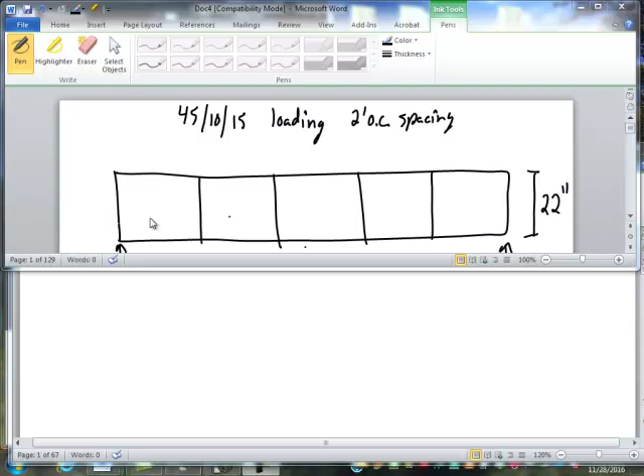Okay, so what we're going to look at today, and I'm going to throw a couple of other things in along with just the truss analysis. We're going to look at a floor truss, a parallel chord flat truss. I haven't put in a web pattern yet, and I haven't given you any of the forces yet, because we're going to look at how we're going to figure that out. So I'm going to throw the web pattern in just like this.

Almost always this web on the heel panel will come down to the lower corner at the bearing or the reaction. For this one, since there's an odd number of panels, the middle one just can go a random direction. We're going to assume that each of these uprights is evenly spaced.

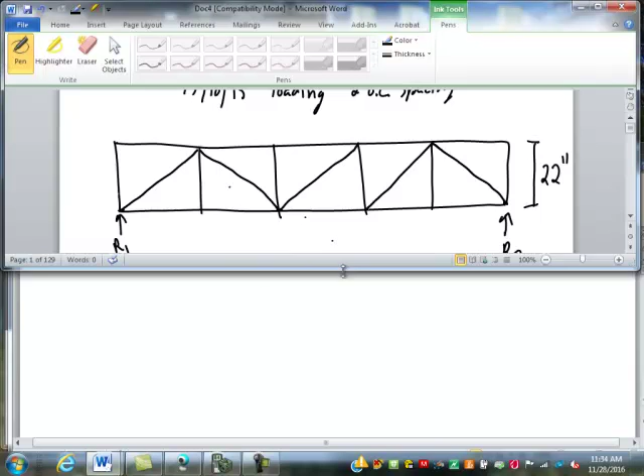So this is, let's go a little bit bigger here for just a minute. This is a 20-foot truss, so each of those panels is going to be 4 feet, or 48 inches.

So one of the first things we have to do is figure out what the load is, what the force is at each of the joints, because we're going to be looking at the joints. Then we have to figure out what each of our angles are. This angle here is going to be the same angle pretty much everywhere in the truss. So let's go ahead and do that first. Good way to warm up, just reviewing some trig.

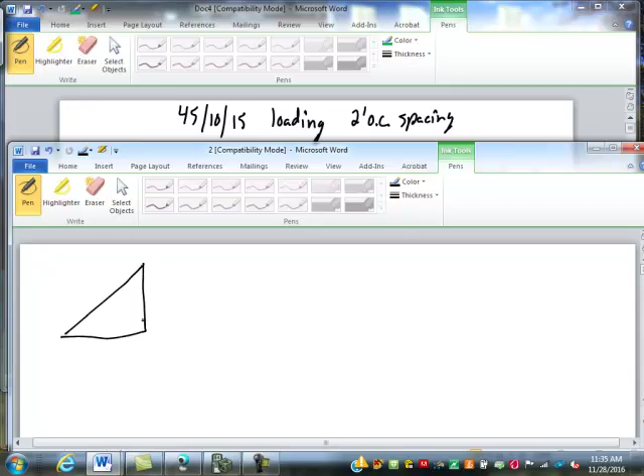So what we're looking at is this angle here. This is a 4-foot, or 48-inch, panel. The truss is 22 inches high, so this is 22 inches here. So this angle, let's see if I go to the right spot.

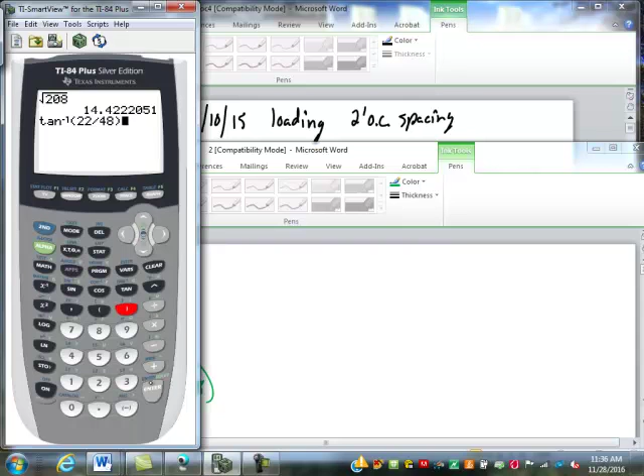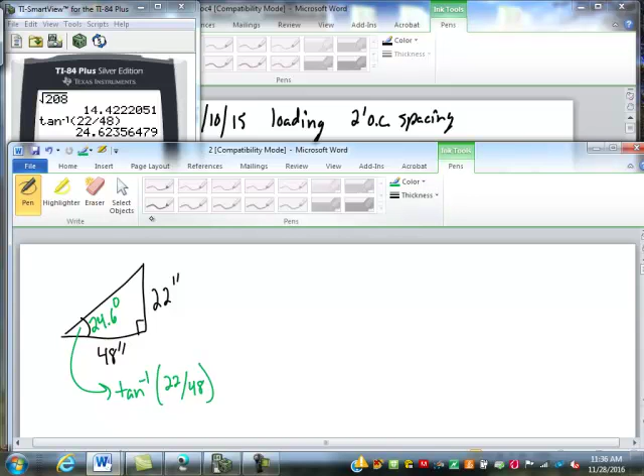That angle here is going to be the inverse tangent of, what two numbers do I put in there? 22 over 48. Perfect, 22 over 48, opposite over adjacent. So we'll do that, inverse tangent, 22 divided by 48. And that gives us a 24.62 degree angle right here. We're just going to go 24.6 degrees. So that's going to be that angle prevailing pretty much everywhere throughout this truss, at every angled web.

Next, I want to figure out what the force is at each joint here, what that added force, that vector is. I have up here 45, 10, 15, loading, 2-foot spacing.

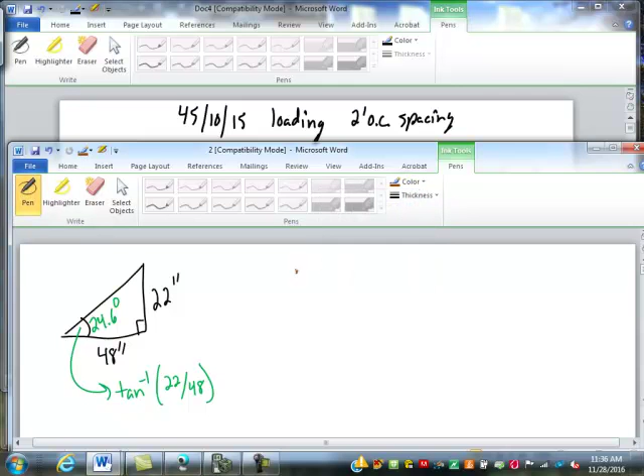What 45, 10, 15 means: the first two numbers, as we mentioned last week, are the top chord loading. The 45 is the top chord live load. The 10 is the top chord dead load, so that 10 is for the floor, the carpeting, whatever else is going to sit on there. Sometimes they'll do a 45-15 if you're going to have tile floors and some heavy furniture and stuff like that. We're just going with a simple 45-10. Now this is per square foot.

Now you'll notice I said 2-foot on-center spacing. So every linear foot of this truss, since it's 2-foot spacing, if I'm looking at it from above, since it's 2-foot spacing, each linear foot of that truss—here's one linear foot of the truss—contains 2 square feet, because it's 2 feet between trusses. So it has 1 foot on each side of that truss that's supported.

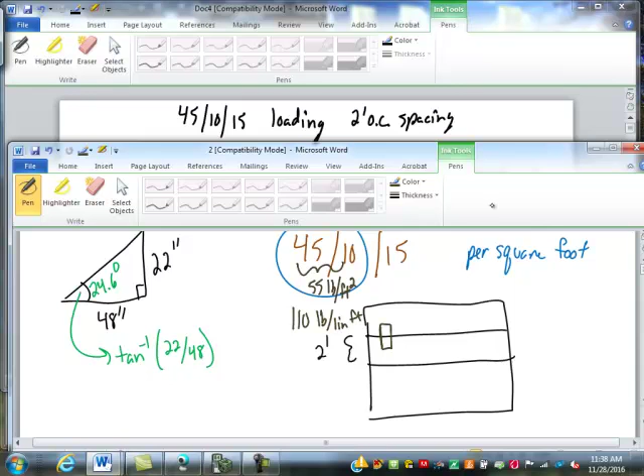So that is 45 plus 10 is 55 pounds per square foot, which is going to turn into, multiply that by 2 because each linear foot of the truss supports 2 square feet, 110 pounds per linear foot. So every linear foot of the top chord of this truss supports 110 pounds.

So now if we go back up here, each of these is 4 feet. We're assuming that they are symmetrical and evenly loaded. So 4 feet times 110 is 440. So each end of this is 220 pounds. Now right here we get 220 pounds from this side and 220 pounds from this side, so that'll be 440 pounds there. 440 pounds here. Here. Here. And then this one's back just 220.

Now I'm going to pause for a second. Any questions on where the 440 and the 220s come from?

So what I did was look at the top chord: a 45-pound live load and 10-pound dead load per square foot, giving 55 pounds per square foot. Looking at a single linear foot of the truss, it's supporting 55 pounds. Because it's a 2-foot spacing, there's 1 square foot on each side supporting 55 pounds, so each linear foot of that truss is supporting 110 pounds.

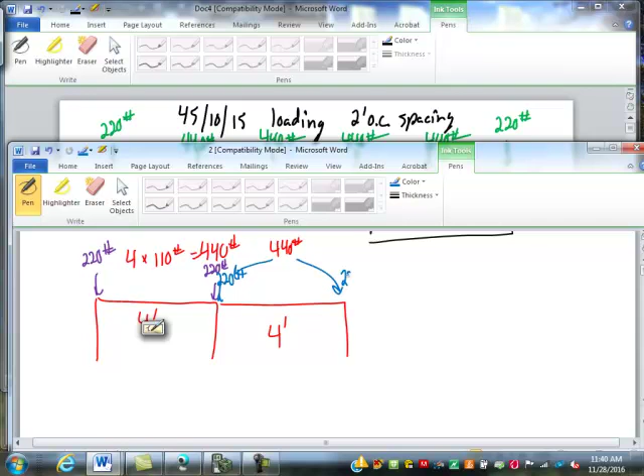However, since this is continuous, this 4-foot panel also supports 440 pounds, half split 220 to each end as well. So right here we have a combination of 220 and 220 - that's where the 440 came from. Each of these gets 220 from each side. This one is only 220 because there's nothing on the other side - it's only supporting one side.

Any questions on that?

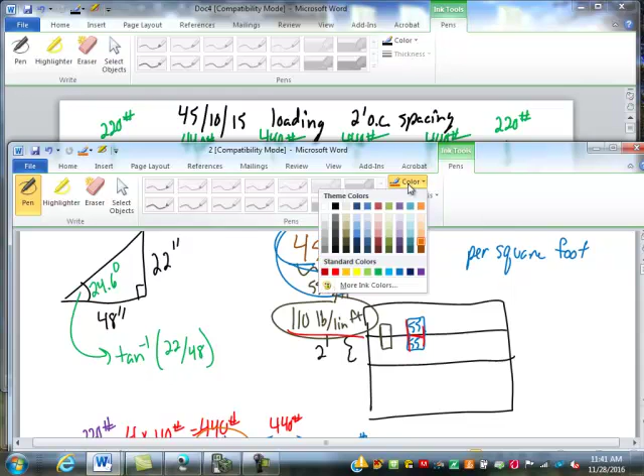Now we have to do a similar thing for the bottom chord. The bottom chord is a 15-pound dead load, for your mechanicals, wiring, plumbing, ductwork, all that stuff, and that's also 15 pounds per square foot. So on the bottom chord, there's 15 pounds per square foot supporting 2 square feet, meaning a total of 30 pounds per linear foot on the bottom chord.

Same type of thing as we did down here. On the bottom chord, 30 pounds times 4 feet is 120 pounds total, half goes to each side - 60 pounds here and 60 pounds here. But again, there's 120 pounds here that's split, so there's 60 pounds coming from that side as well.

60 pounds here. So what that means is back here, each of these joints has 60 pounds coming right here. This one's got 120 because it's 60 from each side - 120, 120, 120 and 60.

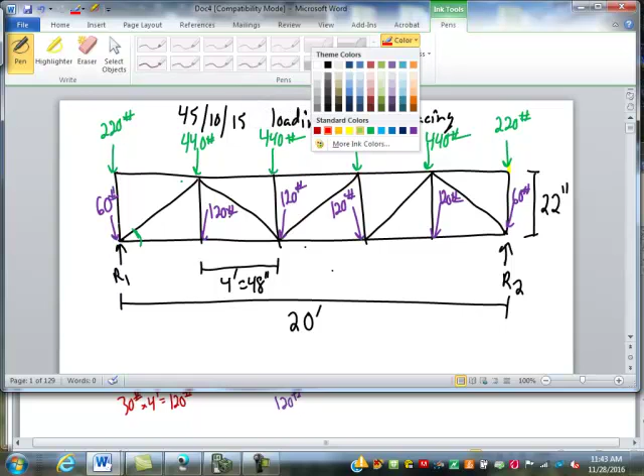So then our next step is to figure out the reactions. If we look at each of these, it's symmetrical, so we're just going to add up our total load and divide it by 2. Have you guys gone through how you calculate a reaction if they're not symmetrically loaded? Using sum of moments? Okay, that's something we'll look at - if we don't get time today, we'll look at it Wednesday. But we have 220, 440, 440, 440.

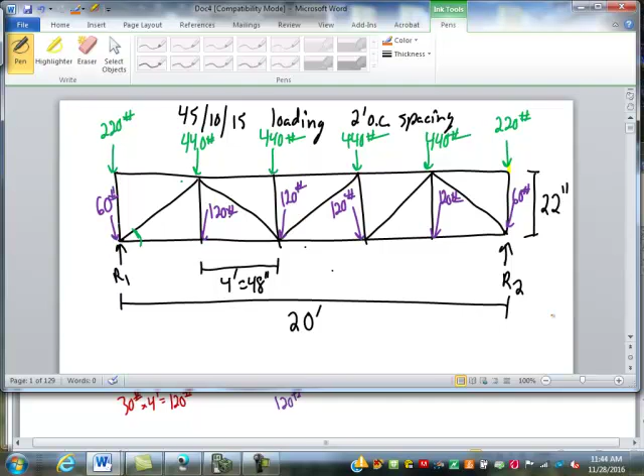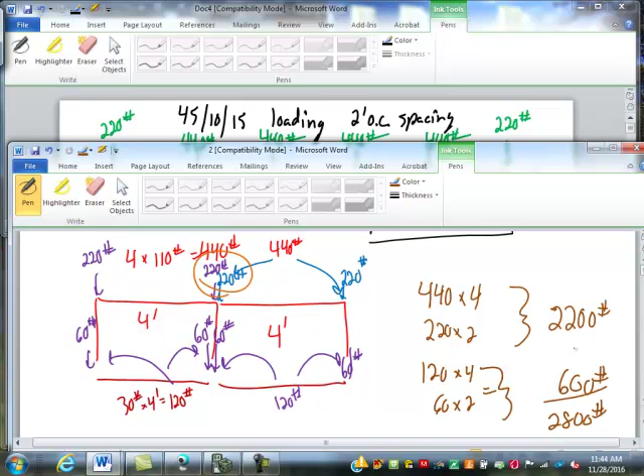Let me do this here quick - shrink this up. So I've got 440 times 4, 220 times 2, giving a total of 2,200 pounds. On the bottom I have 120 times 4 and 60 times 2, giving a total of 600 pounds. So I have a total of 2,800 pounds here of downward load, which means each reaction has to be half of that pointing upward - 1,400 pounds each.

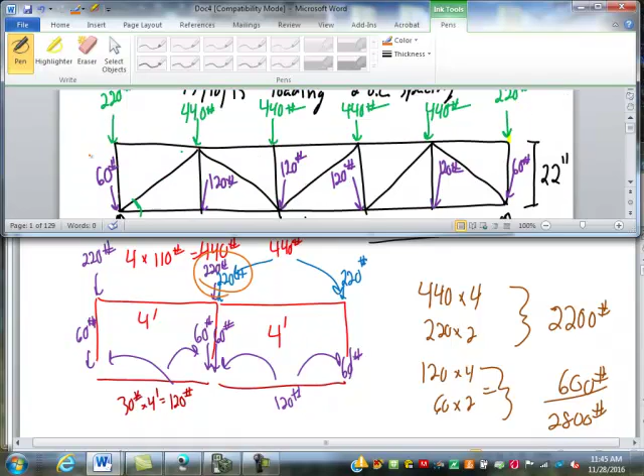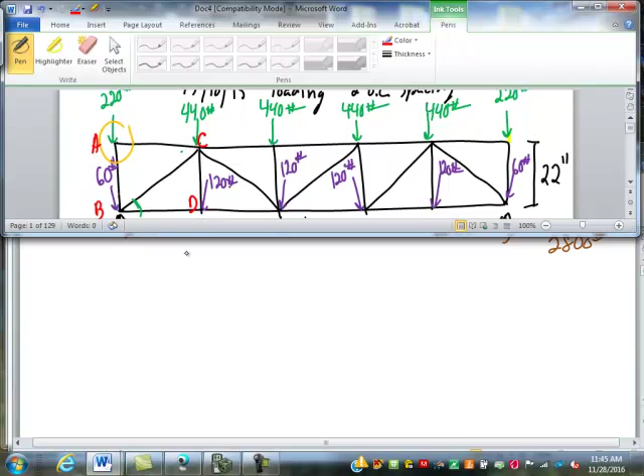Okay, when we go to analyze these, it can be a little bit strange. We're going to start out analyzing this top joint right here. Normally we would analyze first the heel joint at the reaction, but on these, that top joint is simplest because there's only one force and only horizontal and vertical members coming in. So I'm going to call that joint A, and I'll call this one down here B and this one C for now. This one will be D. So we're going to analyze joint A.

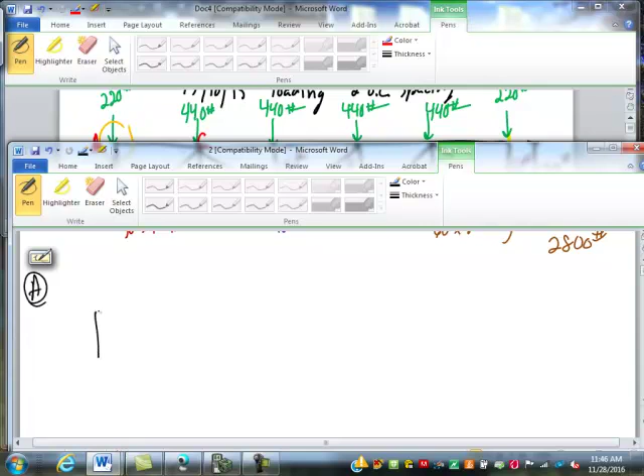At joint A, we've got truss members coming in from C and B, and we have a 220-pound load going down. At this point, that's the only force we have - that 220-pound load. If this were a real floor truss, we would have an additional wall load that we'd put there, but I didn't want to overcomplicate it.

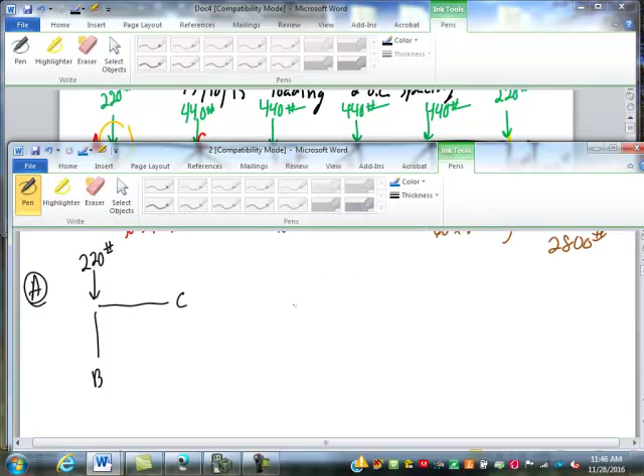So anyway, if we're looking at the sum of our vertical forces, we have the 220 going down, that's negative 220 pounds. C is totally horizontal, so it cannot have any vertical component. B is totally vertical, so it can only have a vertical component - B has to be going completely upright. So solving for B, it has to be 220 pounds. Now from last week, I drew this arrow towards the joint because it has to be going up to counteract the 220 pounds going down. So if that arrow is going towards the joint, is this in tension or compression?

Compression, exactly. So that is in compression. Member B is in compression.

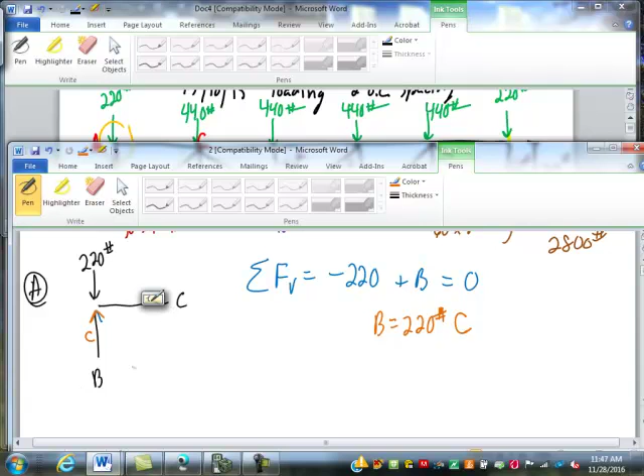Member B here, so that'd actually be force B to A, but I did poor notation there, didn't I? That should be force B to A, is in 220 pounds of compression.

Now C to A here is kind of a funny situation. It cannot be in tension or compression because there are no other horizontal components there to work against it. The only way it would have any sort of load on it is if there were a wind load or something like that coming in from the side. We don't have anything like that right now.

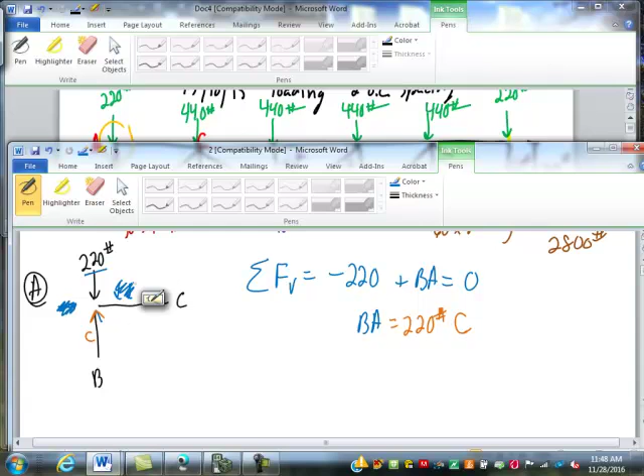So the compression or tension on member C is 0. Now it does have loads. It's got the vertical loads that are split. That's where the 220 came from. But we're not worrying about those right now. Those are bending loads. So if I come back up here, this is 0 pounds. This is 220 pounds of compression.

So if I go to analyze joint B, on joint B, I have the 220 pounds of compression, and so 220 pounds going down, pushing into the joint. I also have the 60-pound load going into the joint. I have this web here coming from C, and I have this heel panel here coming from D. And then, of course, we have the reaction coming up of 1,400 pounds.

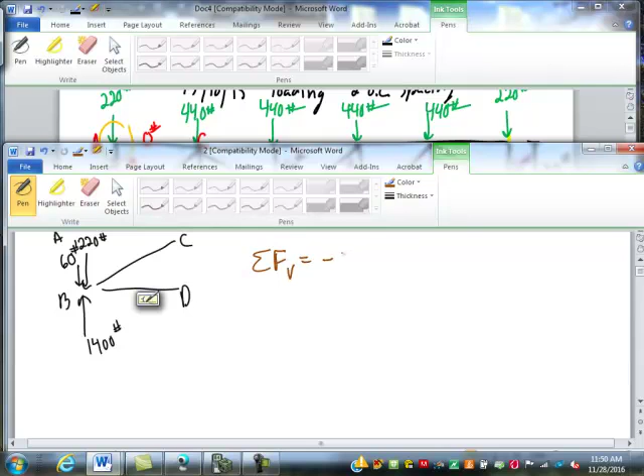So I'm going to look at my vertical forces here. I have a negative 220 because that's pushing down. I have a negative 60 because that's pushing down. I have a positive 1440 because that's pushing up. Right now that would put me at a positive. So I'm going to guess that C here is in compression.

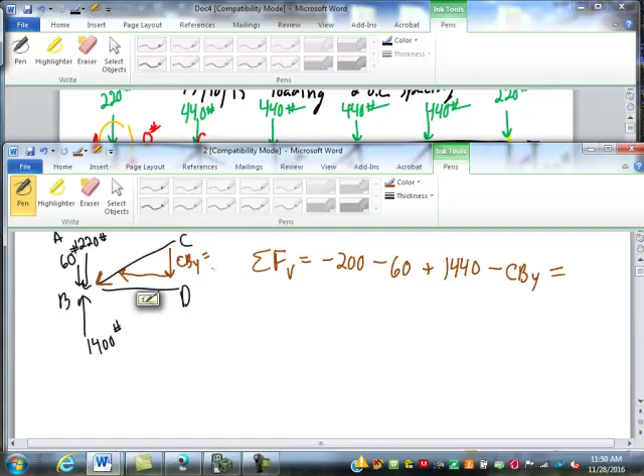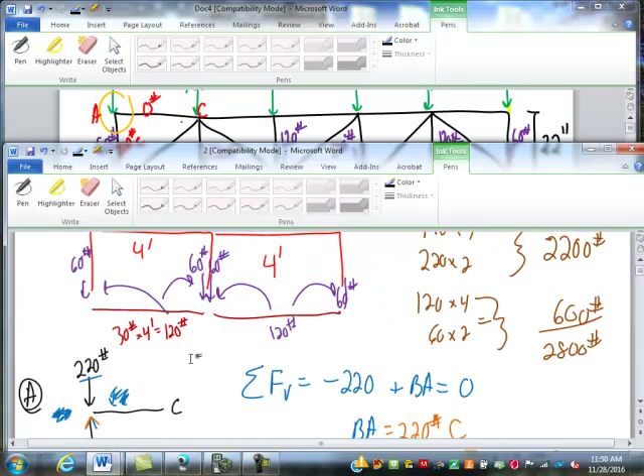What that does is gives me components that look like this. So then I'm going to have a negative CBY, CB vertical force. CBY is right here, and it is going to equal the cosine of that angle, which we said was what, 20? So I'm going to write it down up there. 24.6. I'm going to write it in here so I don't lose it. 24.6 degrees.

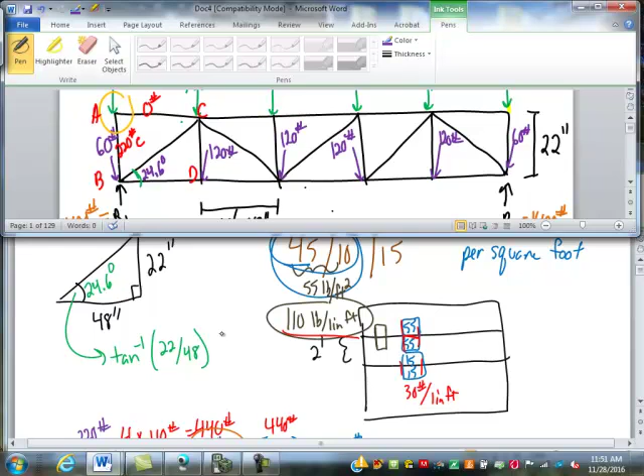Times the full force of CB. And this down here is CBX, which is going to be the sine. Oops, I did that backwards, didn't I? Sorry about that. The angle is down here, so this one would be the sine. This one would be the cosine. That's 24.6 degrees times CB.

Okay, I'm going to pause there for a second. Anybody need to erase and fix their notes because I screwed that up?

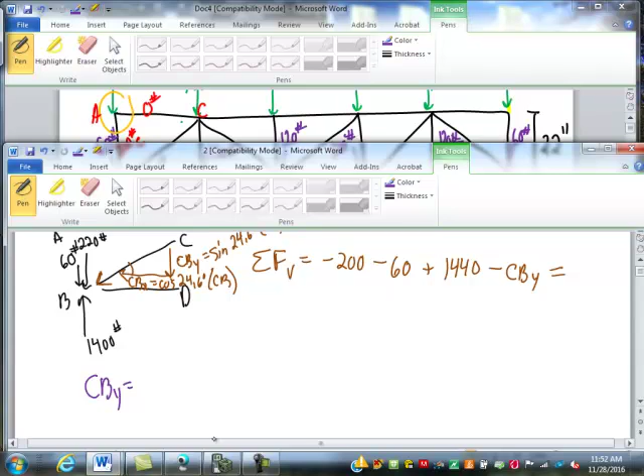So that vertical component, CBY, sine of 24.6, 0.416 CB. So that's going to go here.

Is that all equals 0? So 0 equals, I've got negative 20, negative 200, negative 60 is negative 260, plus 1440 is a positive, was that 1180? Should that be just 1400? Yeah, you're right. Should be just 1400. Is it 220? You're right. Wow. It's going to be one of those mornings, I'm thinking. So 220. Does that all look right now? 220, 60. Yeah. Okay. I'll pause for you guys to fix that.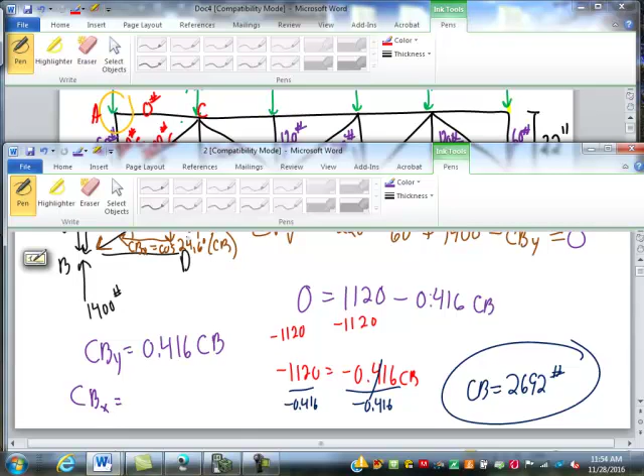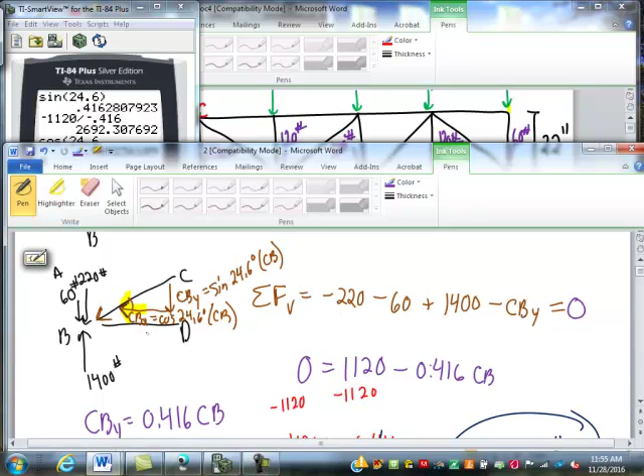So let's do that. Cosine of 24.6 is 0.909 times CB. That is going to be pointing in this direction, just because it has to be continuous with the compression force. So that's going to be the negative direction. So BD, we're going to assume points in this direction. So we're assuming BD is in tension.

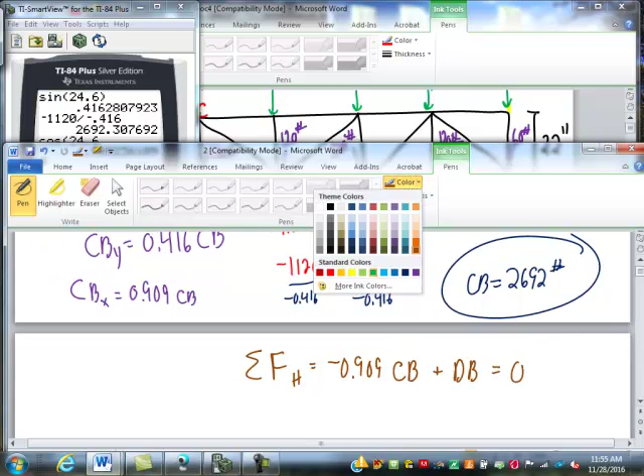So the sum of our horizontals is going to be a negative 0.909 CB plus DB has to equal 0. Now we do know for CB, we just figured it out to be 2692. So let's substitute that in there.

Negative 0.909 times 2692 equals negative 2447. Plus DB equals 0. To solve for DB, we add 2447 to get rid of the negative. That tells us DB equals 2,447 pounds, and that was assumed in tension, and it turned out positive, so we're correct: 2,447 pounds of tension.

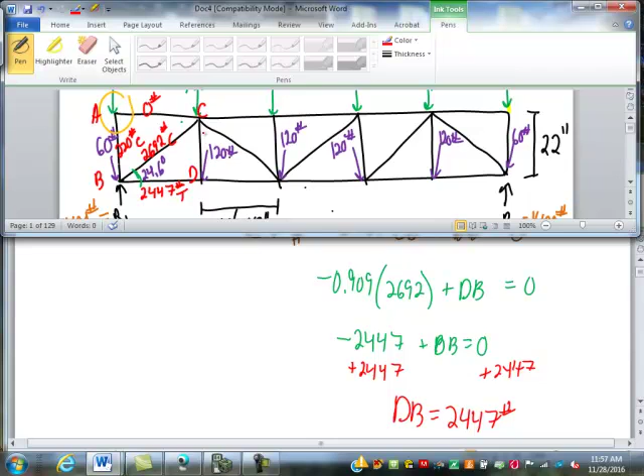Now the question is, which joint do we go to next? Do we go to joint C or joint D? We can only solve a joint if there are two unknown forces. If we looked at joint C, we don't know this one, this web, or this vertical—three unknowns there. We can't solve joint C yet, so we have to do joint D next.

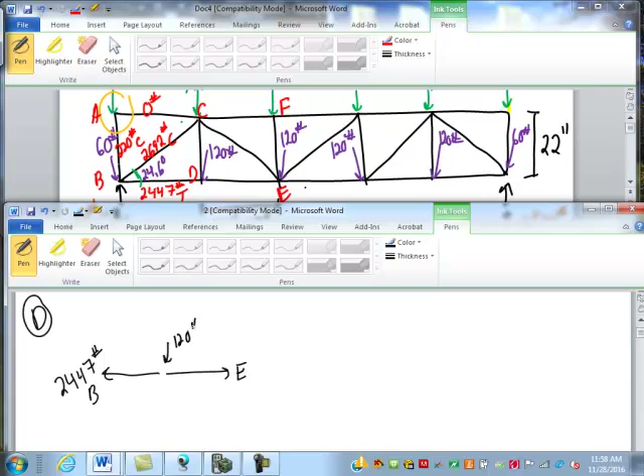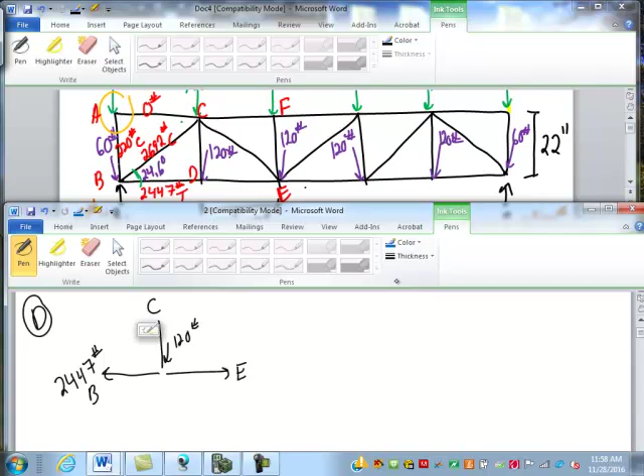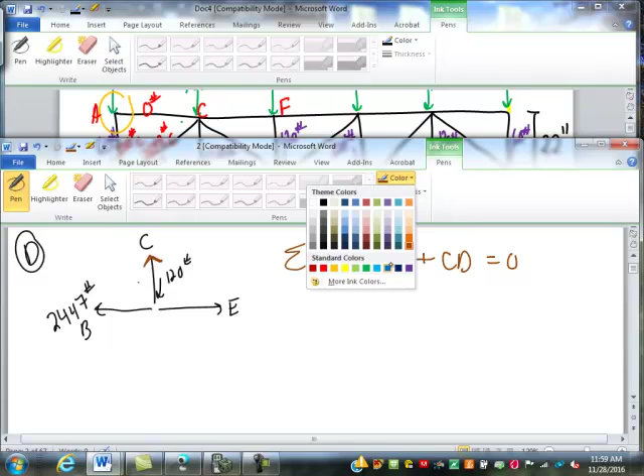This is also a fairly simple joint—not going to give us a system of equations yet, since everything coming in is either horizontal or vertical. For the sum of my vertical forces, I have negative 120 pounds, which is my load, and I'll assume CD is in tension, since it has to counter the 120 pounds, so that has to be positive. There are no other vertical forces since everything else is perfectly horizontal. So solving this equation, adding 120, CD has to be 120 pounds in tension.

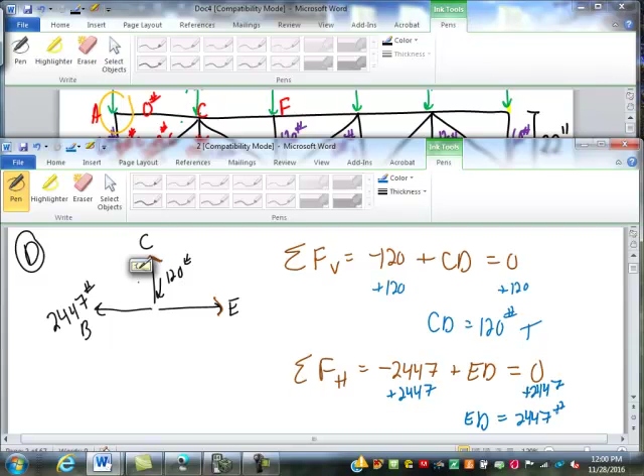That part was pretty simple. For our horizontal forces, the only horizontal components we have are BD, which is negative in tension, so negative 2447, and we're assuming ED is going in tension, so that's positive. Adds up to zero. Solving the equation by adding 2447, ED must also be 2,447 pounds of tension. So that joint's actually kind of boring. Any questions so far?

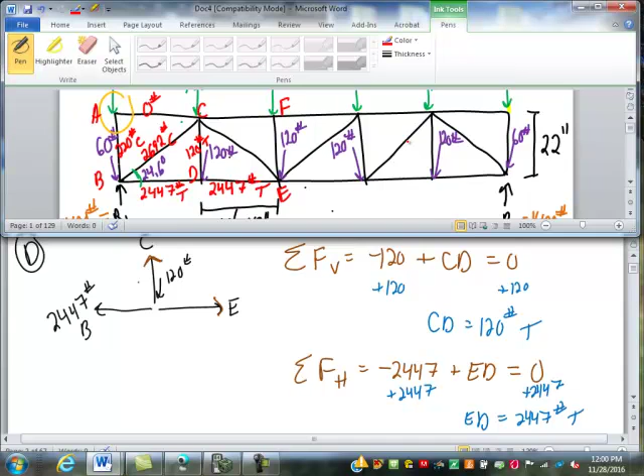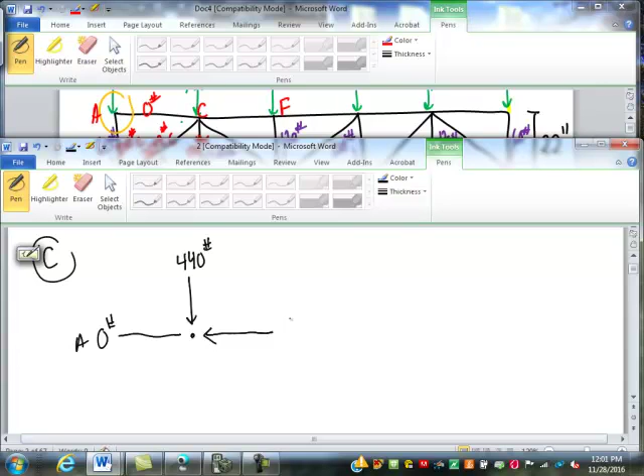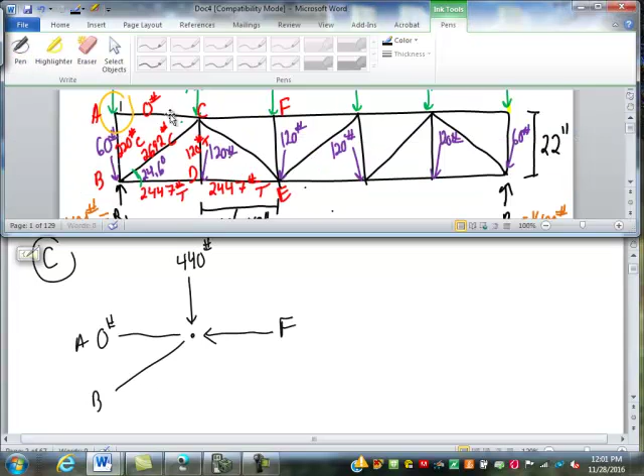Okay, joint C is where it gets interesting. On joint C, we have the 440-pound load. This was zero pounds coming from joint A, so that does nothing. F—I'll just take a wild guess at F being in compression; I don't know what's going on there yet. Coming from joint B, that was 2,692 pounds in compression, so that's going towards the joint. CD was in tension, 120 pounds. Then we have the web here going over to E, and our angle, as always, is 24.6 degrees for this one.

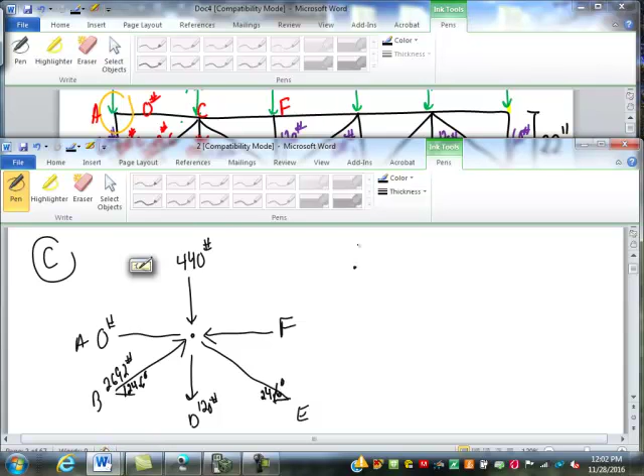So the first thing we have to do is break down our components here on BC—this is going to be BCX and BCY. BCY is going to be 2692 times the sine of 24.6 degrees. Let's do that: 2692 times sine of 24.6 is 1121, I'll round it. So that's BCY. BCX is going to be 2692 times cosine of 24.6 degrees, which I round to 2448 pounds.

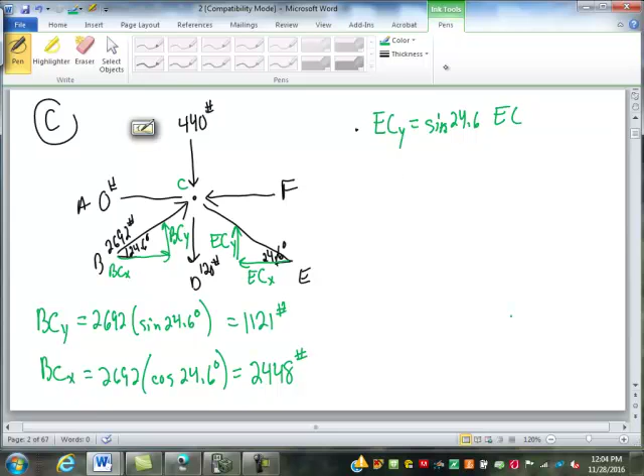Now over here for EC—I'll put the C in there so I don't stumble over it—we have ECX and ECY. I'll do the same thing: ECY is going to be sine of 24.6 times EC—0.416 EC. And ECX is the cosine of 24.6 times EC—cosine was 0.909, correct? Yep. So we've got ECY and ECX listed out.

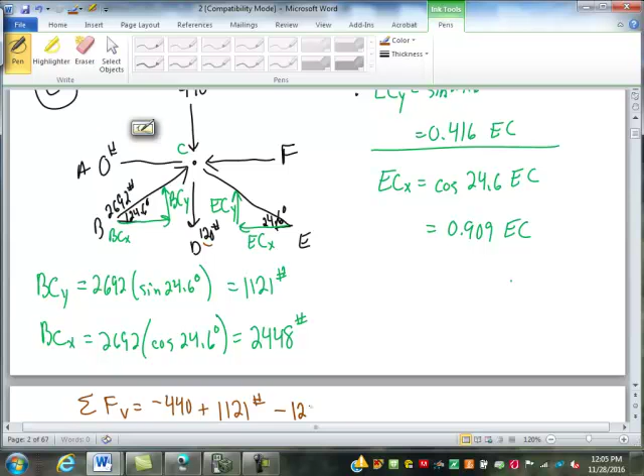FC is going to be strictly horizontal, so we don't have to worry about that. Now let's look at the sum of our vertical forces. We have negative 440 going down, a positive BCY of 1121, and negative 120 coming from here. Notice I'm going around this counterclockwise—it's a habit I got into. When I learned vectors, I learned something called Bow's notation, and in Bow's notation you always go around the joint counterclockwise. So I had negative 440, then going down I had the component from BC, positive 1121, DC is negative 120 because it's in tension. Next is the component from EC—I assumed that was in compression, so it's pointing up, a positive ECY of 0.416 EC. And that's it, because FC has no vertical component.

So let's simplify this and see what we get here. Negative 440... I'm going to cheat.

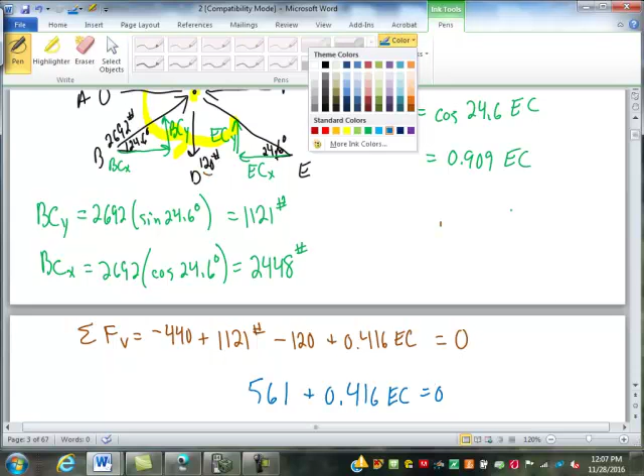561 plus 0.416 EC equals 0. So now I can subtract the 561. 0.416 EC equals negative 561. So I'm going to divide that negative 561 by 0.416, and I get a negative 1349.

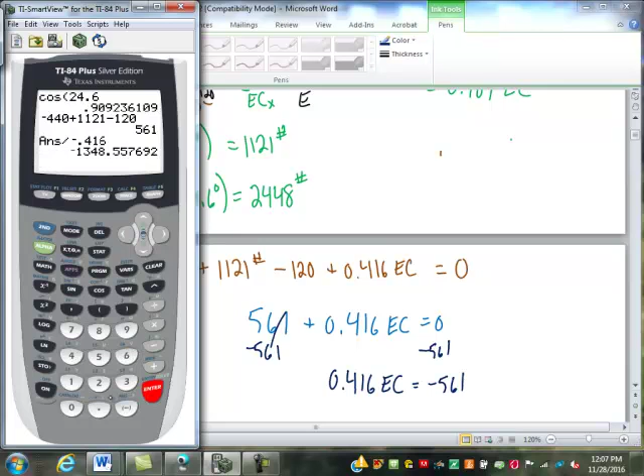So EC has a force of 1,349 pounds. The negative means I made the wrong assumption. I had assumed EC was in compression. It's actually in tension. So I now know that EC is 1,349 pounds in tension.

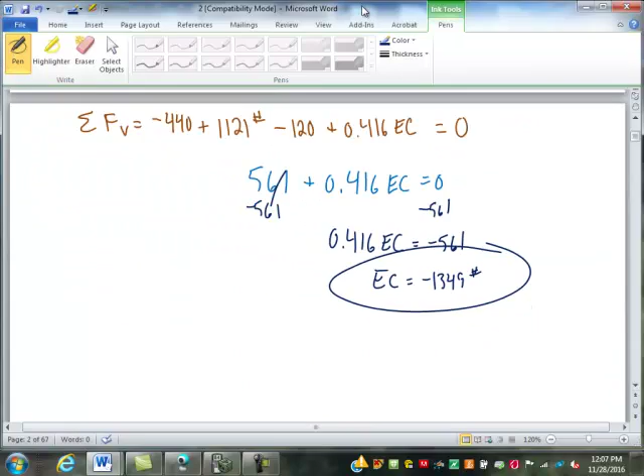Now I can go back and do the same thing for my horizontal forces. Now that I know EC, I can find ECX here. It's just going to be 0.909 times 1349, which equals 1226.

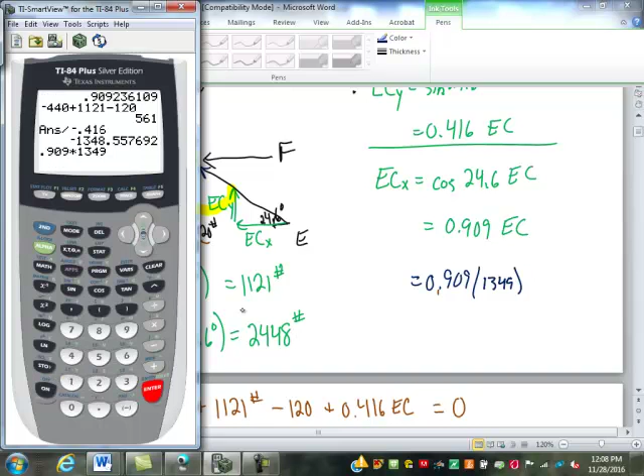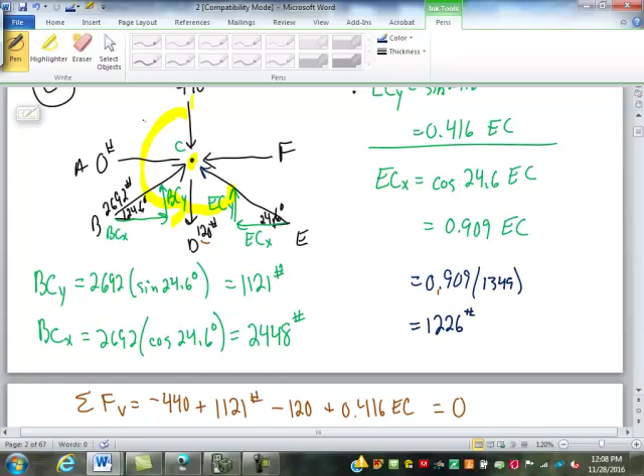So now to do my sum of horizontals, I'm just going to go around here again counterclockwise. There's no horizontal force there, this is a 0. So my first horizontal force is BCX, which is 2448 in the positive direction.

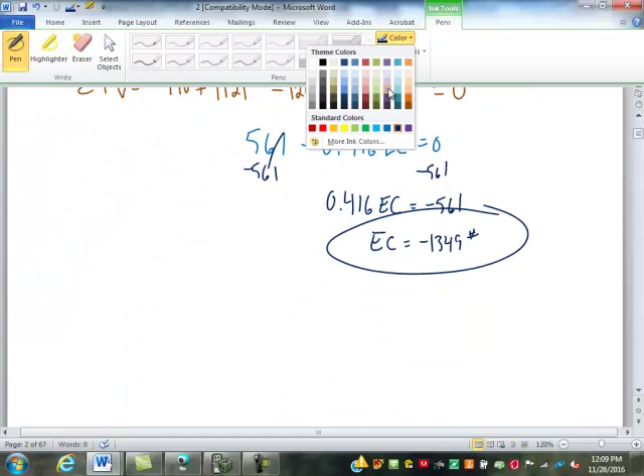As I keep going here, this is all vertical, so it can't be a horizontal component. ECX is going in the, now again I said I was wrong, it's actually tension, but I have to stick with my original assumption to be consistent. Technically this should have been negative here, so this would be a negative 1226 going this way. So subtracting a negative is adding a positive, so that's 1,226 pounds.

I'm going to pause there for a second. Everybody understand why that's a positive going in there? Because even though it's pointing this direction, it's a negative force because I had made the wrong assumption. So it's in the negative direction and it's a negative force, so minus a negative makes a positive, plus a positive.

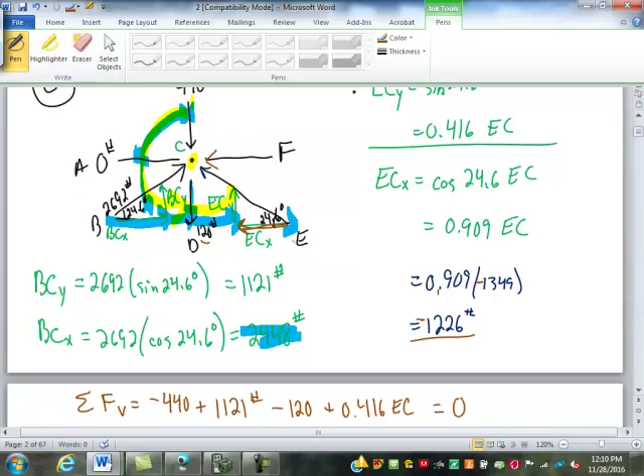And then I have FC here, and I can tell you right now my assumption there is incorrect. So I'm going to actually change it since I haven't used that for any other calculations. That has to be, oh sorry, that was the correct assumption. That has to be going in the negative direction because everything else is positive. So I'm going to put in minus FC there, equals 0. So that has to be in compression.

So I can combine these here: 3674 minus FC equals 0. And I'm going to let you guys do the algebra to solve that to get 3674 equals FC.

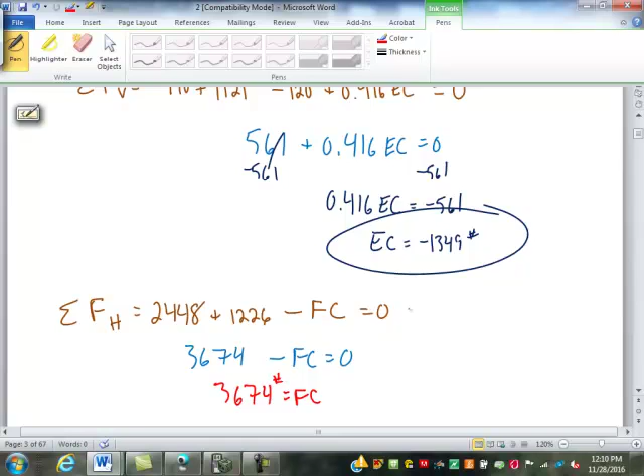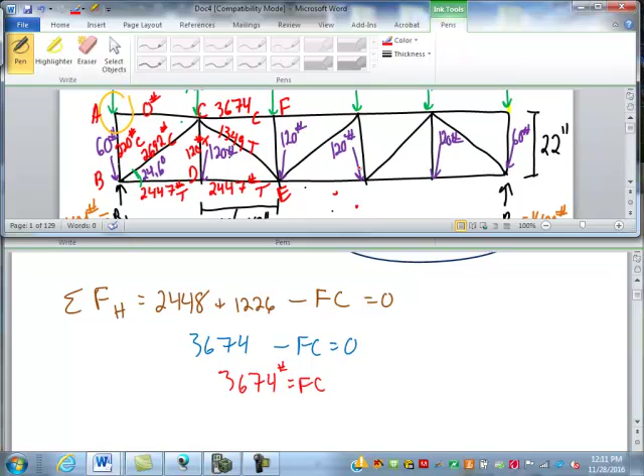I'll get there for now. Okay, so you can see here with the parallel chord, the flat top truss, it's a lot simpler because we don't have systems of equations that we encounter because we don't have angled top chords. Now, one thing I had said I would show you here, well, how to find those reactions. Since we only got 10 minutes left, let's do how we find those reactions if it's not a symmetrically loaded truss.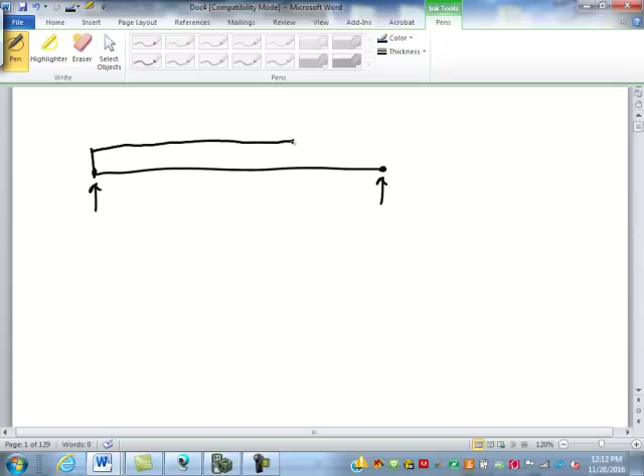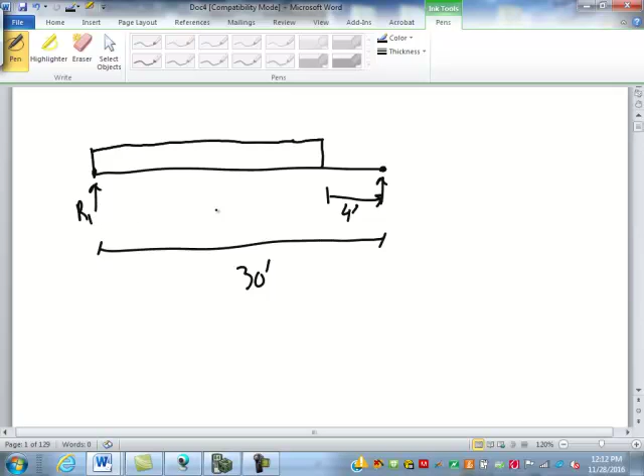Now I'm just going to draw it as a flat line here and place the loads on it. So this is a horizontal projection of my loads. Let's say this is a 30-foot truss. Let's put this at 4 feet from the end. So this box is what we call a uniform or distributed load. We're going to call that 60 PLF, so that's 60 pounds per linear foot.

And I'm going to put some what we call concentrated or point loads in here. I'm going to put one right here, 2 feet from the end, and I'm going to call that one 200 pounds. And I'll put one over here, 6 feet from this end, and I'm going to call that one 400 pounds.

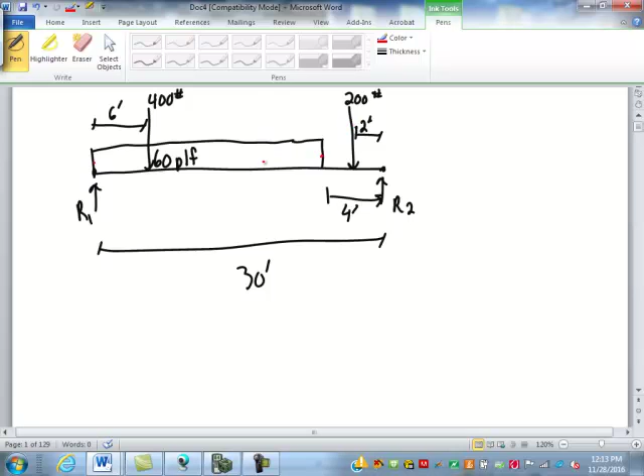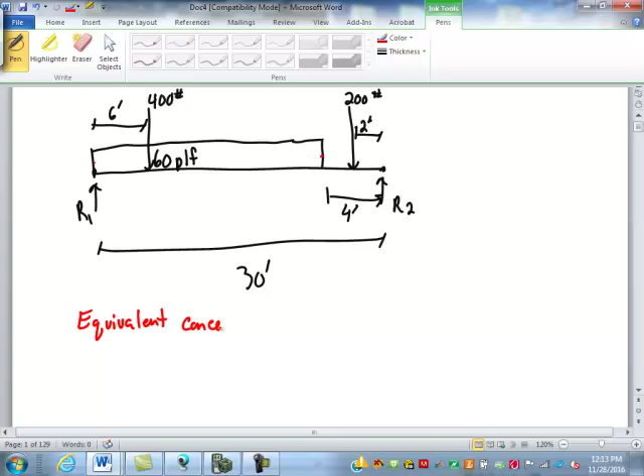So one of the first things you have to do is get rid of that distributed load. You do what's called an equivalent concentrated load. The equivalent concentrated load is equal to the total load at the center of the distributed load. That's a uniformly distributed load, sometimes called a rectangular load, which means we can go at the center. If it's a triangular load or non-uniform distributed load, then it's not going to be at the center.

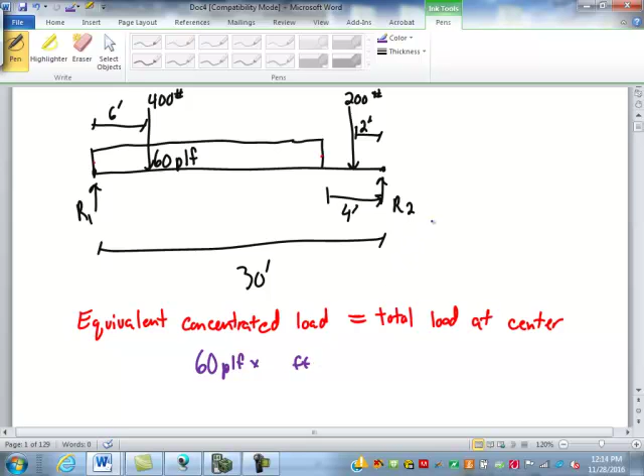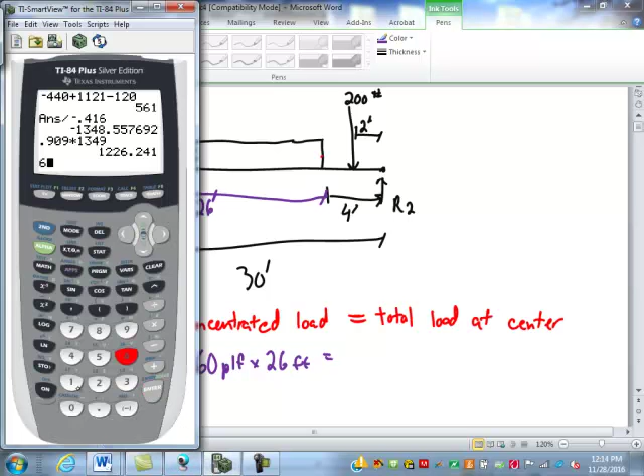So that total load is 60 pounds per linear foot times how many feet? From here to here is 26 feet, right? 60 times 26 is 1,560 pounds. So I'm going to pause. Any questions on where the 1,560 pounds came from?

Okay, so the location of that is going to be at the center of that distributed load, 1,560 pounds. That's now 13 feet from the end. So what this has become now is this picture here.

I have it 6 feet, 400 pounds. I have it 13 feet, 1,560 pounds. Then I have over here, 2 feet from the end, 200 pounds.

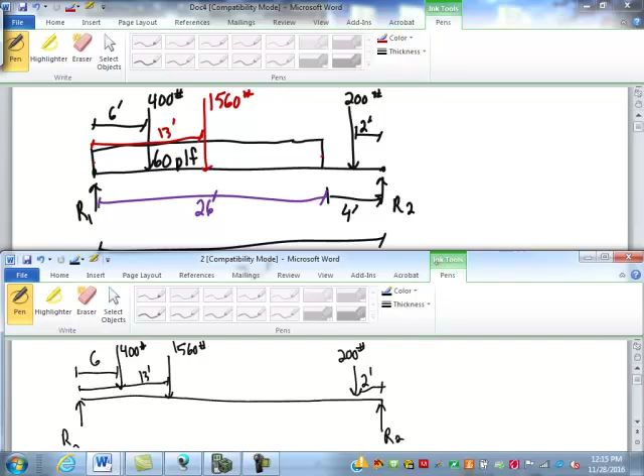To solve this, I pick one end to be a center of rotation. So I'm going to pick this end right here to be a center of rotation. I know that the sum of the vertical forces has to equal 0.

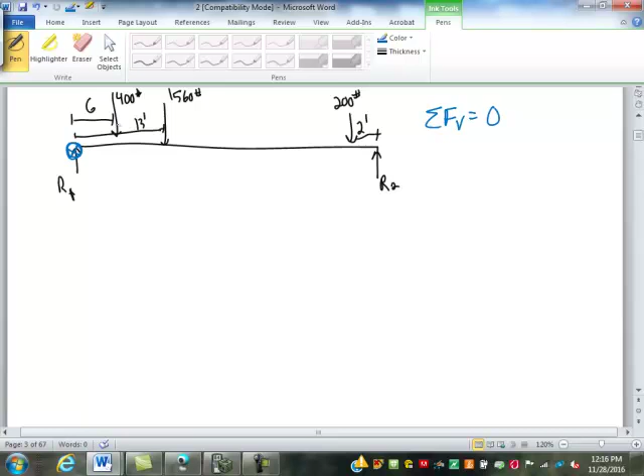I have negative 400, negative 1,560, negative 200, and positive R1 and positive R2 adds up to 0. So R1 plus R2, if you do the math and rearrange it, has to add up to 2,160 pounds.

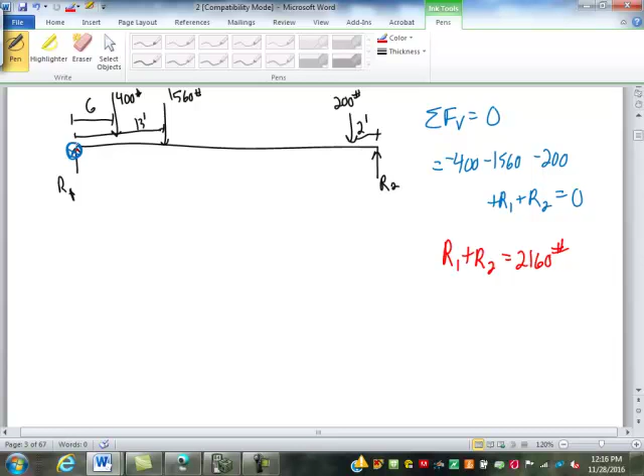But it's not evenly distributed, so it doesn't go half each direction. I know the total between R1 and R2 is 2,160, but I have to figure out how much goes to each side. That's where this center of rotation comes in. So what I'm going to look at is the sum of the moments.

Now I'm going to put M1 - the 1 means I'm going about reaction 1. Have you guys talked about a moment at all? A little bit? Okay, a moment is just a force times a distance. That distance is from a center of rotation.

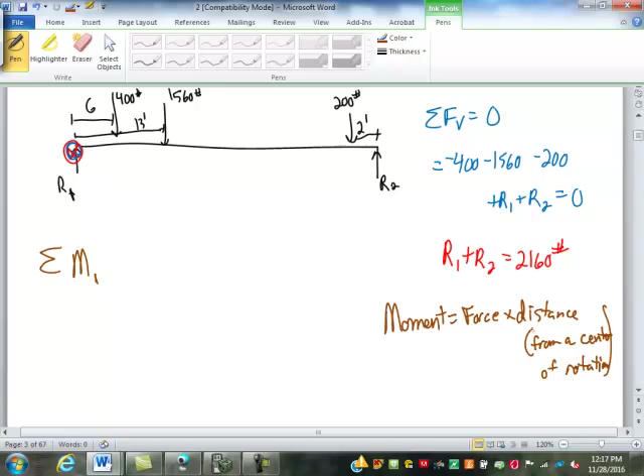I chose R1 to be my center of rotation, so all my distances come from R1. I've got the 6 feet, the 13 feet, and going to the 200-pound load, that total distance was 30 feet, minus 2 is 28 feet to that. So it's 30 feet all the way over to R2.

For each load here, I'm going to find its moment. I'll define clockwise rotation to be positive, counterclockwise to be negative - doesn't matter which way, just keep one direction positive and the other negative. The 400 pounds is going to cause this to spin clockwise. If I held it here and pushed there, it would spin in this direction - that's clockwise. So that is a positive 400 times 6 feet.

The 1,560 pounds is also clockwise, so that's 1,560 times 13 feet. The 200 pounds is also clockwise, so that's 200 pounds times 28 feet. R2 would be pushing the other direction, so that's R2 times 30 feet.

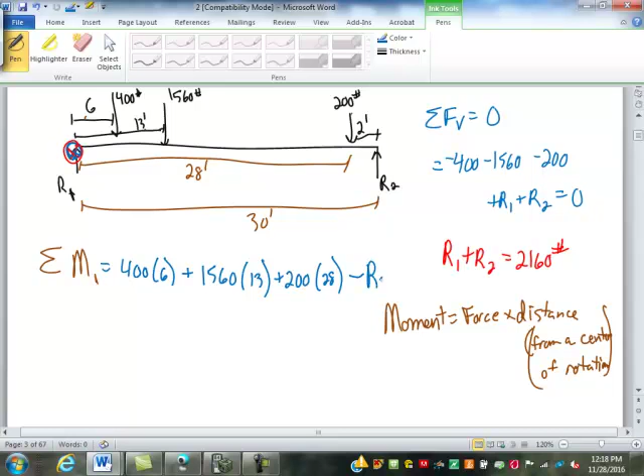And that has to add up to 0. So 0 equals 400 times 6 is 2400. 1560 times 13 is 20,280. 200 times 28 is 5,600, minus 30 R2.

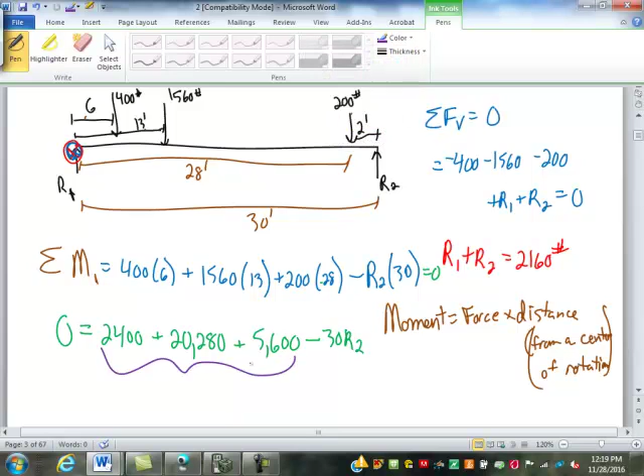So I have to combine all these: 28,280. So 0 equals 28,280 minus 30 R2. So again, 28,280 equals 30 R2. Divide by 30. R2 is 942.67, or 942 and 2/3.

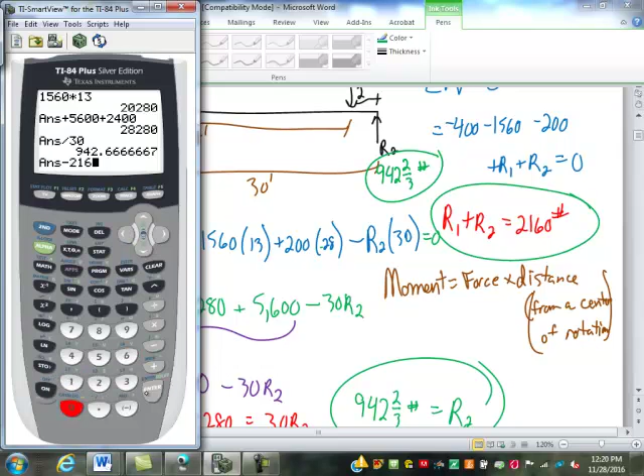Now, of course, to find R1, I just use the sum of my vertical forces. Those two have to add up to 2160. So I'm just going to subtract my 942 and 2/3 from the 2160, giving 1217 and 1/3. Does that make sense?

On Wednesday, I'll start out and do a little bit more with these reactions. Then we'll look at a sloped top chord truss again, so we'll get back to doing the systems of equations. What we'll do Wednesday is leave it up to you guys as to how much more you need.